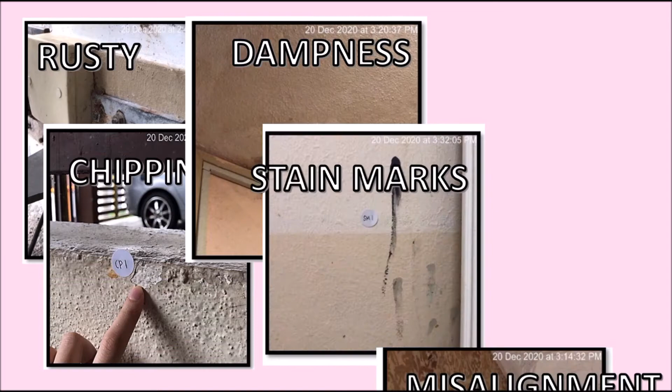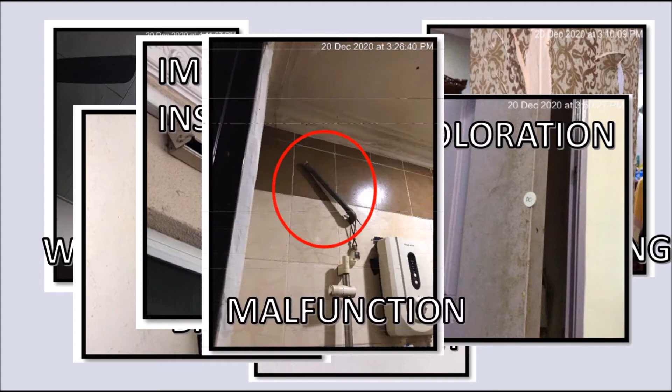The defects consist of rusty, chipping, dampness, stain mark, misalignment, cracks, blistering, hole, water stain, insect attack, peeling, broken, discoloration, improper installations, malfunction, sagging, and gap.

The 3 major defects are crack with 16%, peeling with 60% (which consists of peeling paint and peeling wallpaper), and malfunction with 10%. Therefore, the maintenance and repair work should be carried out and focused on these 3 major defects.

These are some of the examples of major defects that occur in this building.

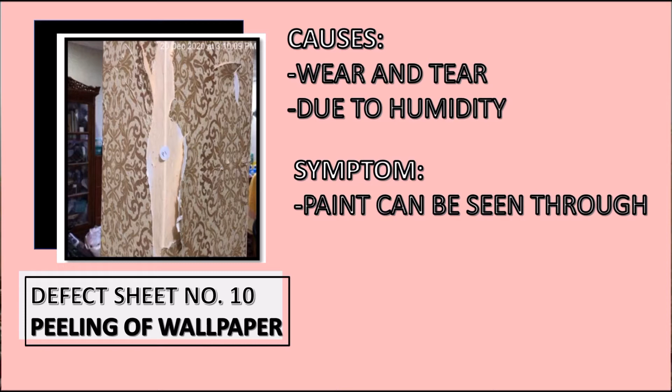Defect sheet number 10 is the peeling of wallpaper. This defect is caused by wear and tear, and also due to humidity, as moisture behind the wallpaper can weaken the seal. The symptom identified is paint showing through, which may lead to more peeling in the area and will reduce the aesthetic value of the building.

The remedies are to peel the wallpaper away, scrape away as much of the glue with a putty knife, rinse the wall with warm water to remove any lingering gel stripper, and install new wallpaper.

Next, defect sheet number 14, which is dampness on the plaster ceiling. This is due to leaking of the roof.

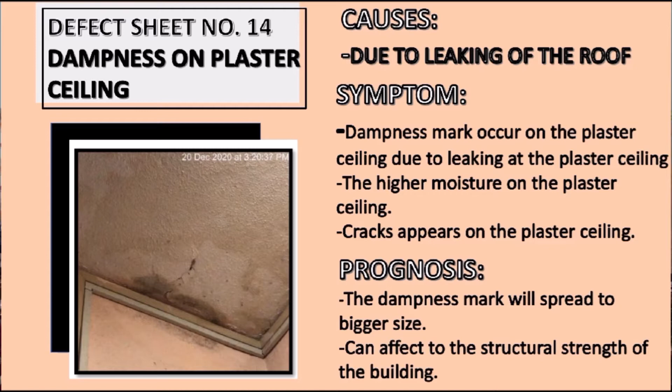The symptoms that can be seen are dampness marks occurring on the plaster ceiling due to leaking, and cracks also appear on the plaster ceilings. This might lead to dampness marks spreading to a bigger size and can also affect the structural strength of the building.

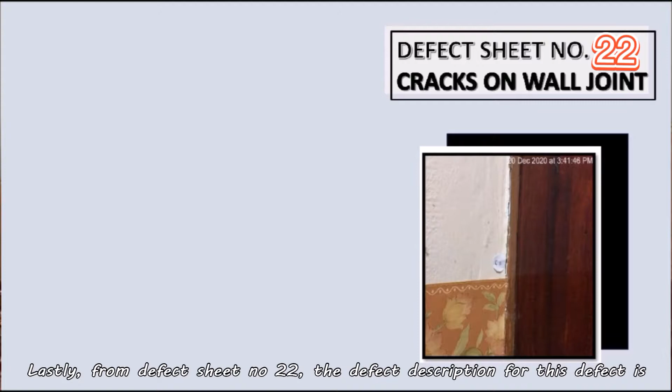Lastly, from defect sheet number 22, the defect description is cracks on the wall joint. This is due to different mixtures of concrete and also expansion and shrinkage of the concrete. It can be identified by vertical cracks appearing on the wall joint.

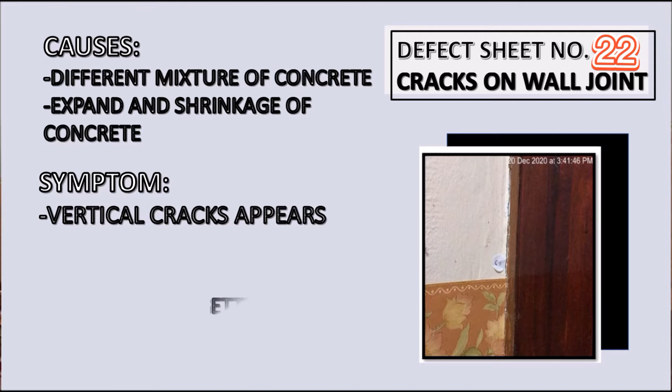For prognosis, the crack will get bigger and cannot support the pressure from above.

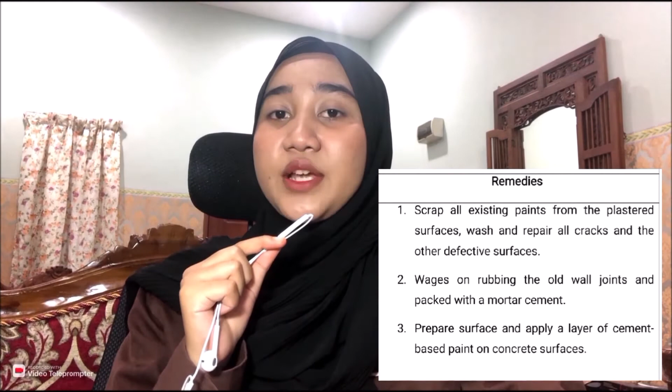The remedy work for this defect is: first, scrape all existing paint from the plaster surfaces, wash and repair all cracks and other defective surfaces. Second, wedge and rub the old wall joints and pack with mortar cement. Third, prepare the surface and apply a layer of cement-based paint on the concrete surfaces.

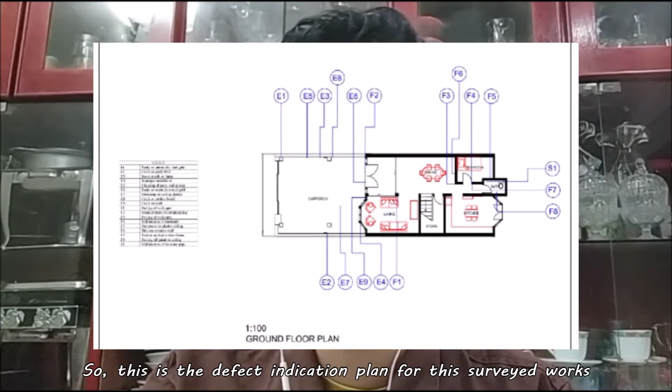Through our inspection, there are 12 defects considered at fair condition, and these defects should be solved with immediate action, as they might become worse if left unattended over a period of time. The defects will weaken the strength of the building and might expose the occupants to danger and fatality. So this is the defect indication plan for the survey works.

After all the inspection works had been done, a defect rectification cost was made for the client. Costing works were made based on JKH, the Jadual Kadar Harga, which can be issued and referred to by JKR. These are some examples of defect rectification costs for these survey works.

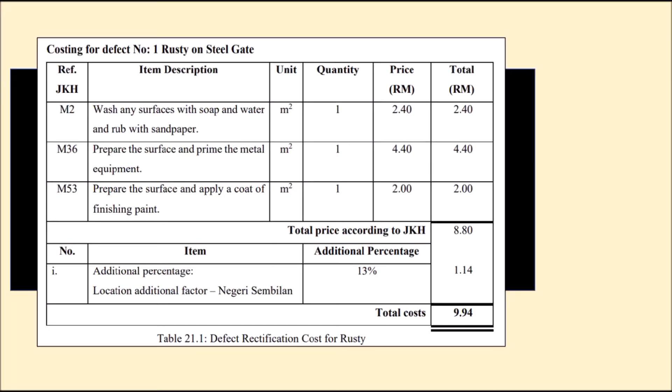Costing for defect number 1, which is rusty steel gate, takes about RM9.94. This is because it consists of the use of material needed for the rusty gate.

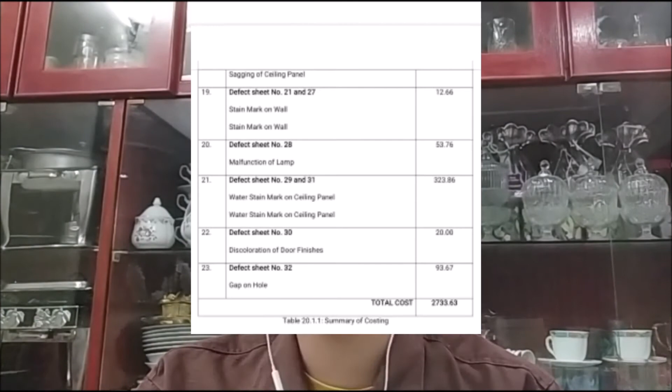For defect numbers 2, 9, 22 and 26, the same defect rectification cost is used because they use the same method in their remedial works. For the overall summary of the costing, it takes about RM2,733.63 for the total cost of the remedial works.

Based on our inspection at the case study, the overall building rating of this house is fair condition. The total defects of this building are 32 and the total metric is 186, making the total score of this building 5.81.

Major repair that should be done in this case study is repaint work. Therefore, based on the inspection, we conclude and recommend the owner of this building to repaint the elements and structures affected in the building, because the major defects found in this building are rusting and peeling of paint. The type of defect that affected the elements needing major repaint are crack and peeling, as noted by the defect sheets, at 16% of the total defect sheets.

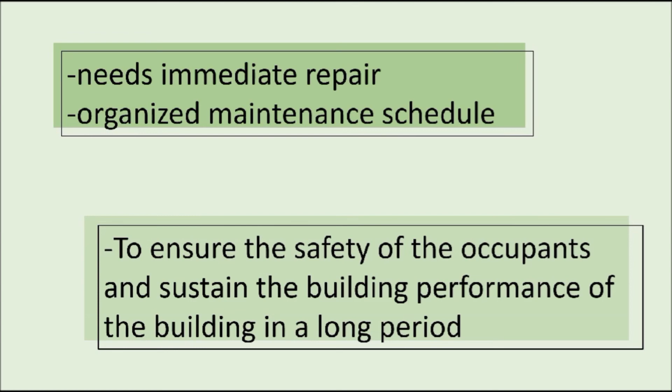In a nutshell, from our inspection, we conclude that this building needs immediate repair and an organized maintenance schedule. This is to ensure the safety of the occupants and sustain the performance of the building in the long period. That is all from us. Thank you.